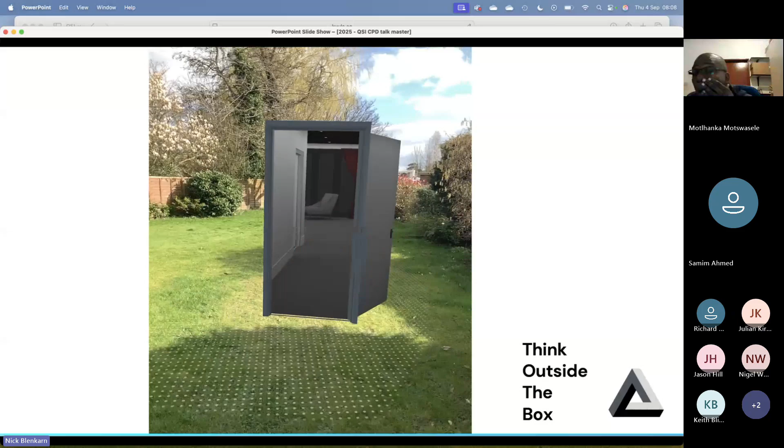Using it respectfully and using it sensibly - there's no point diving into new technology and doing something wrong, as we said with AI at the start. So a bit more of an introduction.

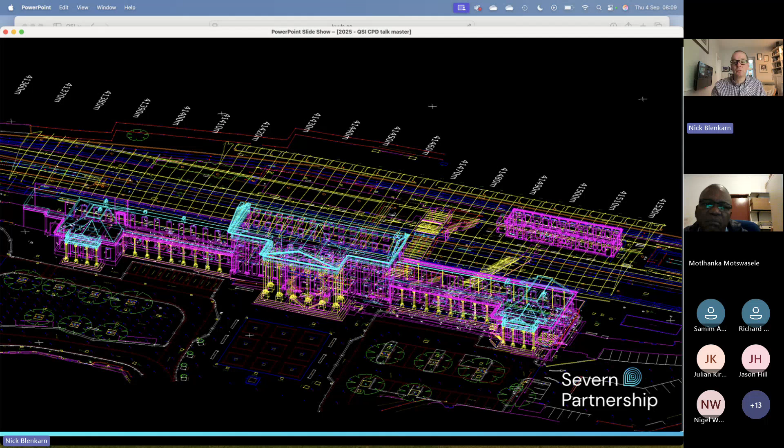That's my background: surveying large infrastructure projects, measured building surveys, elevations, and progressing to laser scanning, which we all know very well, but still massive data sets, very clunky to get into. Usually you have to have a powerful gaming PC to actually access and use it sensibly. So all this wonderful data quite often comes too late in a project and is too heavy or complex to look at and use. By the time we've gone from specifying elevations through to getting complex building information models, it's layers and layers of complexity and very heavy data, complex to visualize.

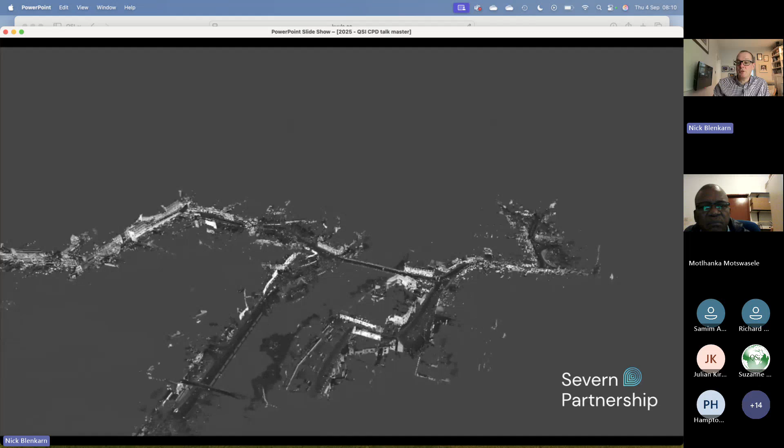If we have a look at one example - everybody knows static LiDAR, and hopefully most people know mobile mapping, but I have to put this example up. If you look on BBC Countryfile, there's an example of this being used by the National Trust by my old company, Severn Partnership. This particular example shows how you can get 5 minutes drive through town, real-time mobile mapping on the back of a vehicle. Since this was done, they're also able to, at driving speed, map the pipes underneath the surface of the tarmac. The accuracy we're looking at is a few millimeters on a cross-section side to side on the bridge, picking up all the elevations as you go through.

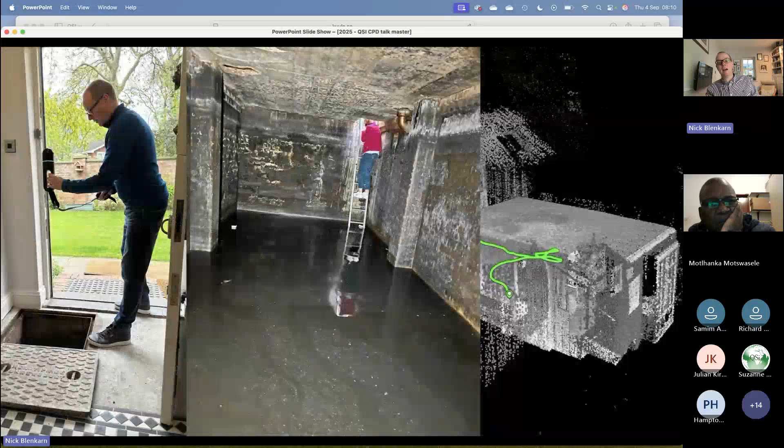So this is 2014 - you can see how far we've come with data now. That kind of data is actually subject to AI now, automatic pothole detection, automatic mapping, automatically removing cars from the scene. There's a lot of automation, but still we're only just getting to share that data nicely.

Moving on very quickly - this is my own house. When we moved in, we knew we had a well in the front of the porch, but it turned out it wasn't a well, it was a tank. So the first thing we did was use the BLK2GO scanner and scan it. What you can see on the right-hand side is live data from the scanner actually scanning that tank as it's going, on my mobile phone.

So we're starting to get more access to the data - you can see what you've got on screen there, and you know you've got it in the field. That makes it easier to get very complicated information in nooks and crannies around a site. Never let anybody tell you that you can't get information down there, up there, above ceiling tiles, down in tanks. It's possible now if you're using the right tool for the job.

Very quickly, as I say, this isn't about laser scanning, but I had to do a bit of an introduction. There's handheld kit with a 360 camera on top, which allows you to very quickly walk around the site, use active LiDAR with a scanner like this FJD Trion, taking 360 video at the same time as scanning, using the video to colorize the scan cloud and enable very quick mapping.

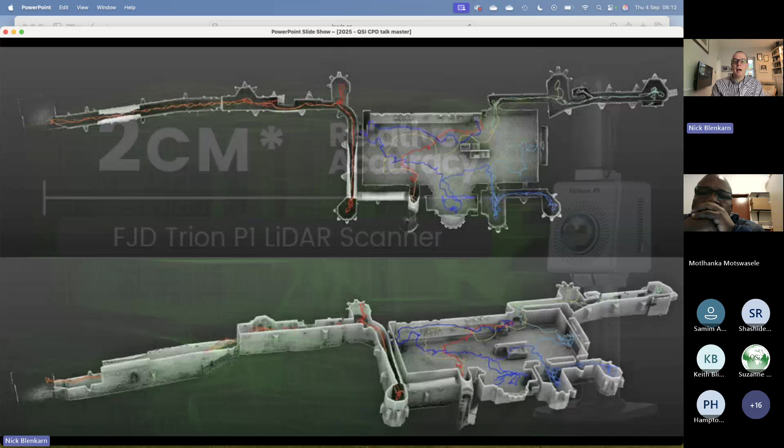If I quickly go on from there, you get things like the NavVis, which the NBI at Wolverhampton have, which shows you what you've got, gets a trajectory around site. You've got confidence in your survey, and you can scan an awful lot of information in one go. We've got some live examples of NavVis if anybody wants to see those later. So what you can do in a day or 2 days with the NavVis is what used to take maybe a week with a terrestrial laser scanner, and that's the kind of data you're getting from it.

So the point of showing those was to give an introduction to high accuracy virtual tours. If you can get that kind of NavVis scan data very quickly, right at the start of a project, you've got the ability to add information to it, add notes, add tender information, and measure from it. I say measure from it because this is a quick screenshot of some windows open in NavVis IVION Go.

So the point of NavVis, as an example, is it's high accuracy scanning down to a couple of centimeters, or even a centimeter if you do it well, but processed in the web and delivered almost next day. The processed data can be used in a web page and shared with non-technical people.

So you can share it potentially with the right allowances for security with contractors at the start of a job to give them a level playing field to look at the site, to hopefully - and these are some of my key points - aggregate information in one place, georeference it against individual items in that scan. It's showing you 360 images, which we can see on the screen, and behind that is the complex scan data you can measure to the centimetre from.

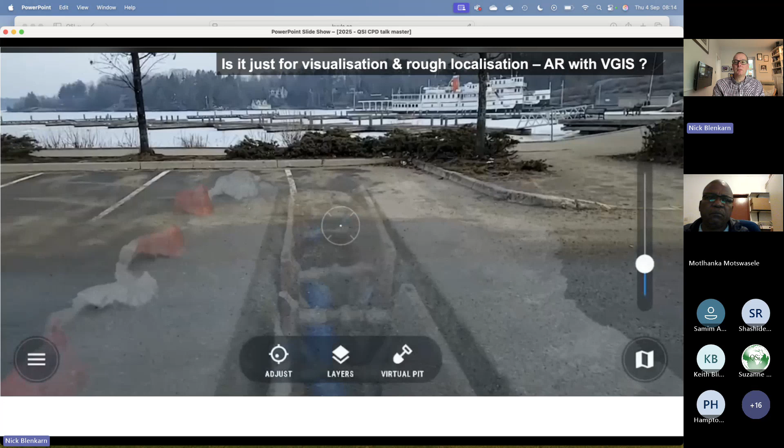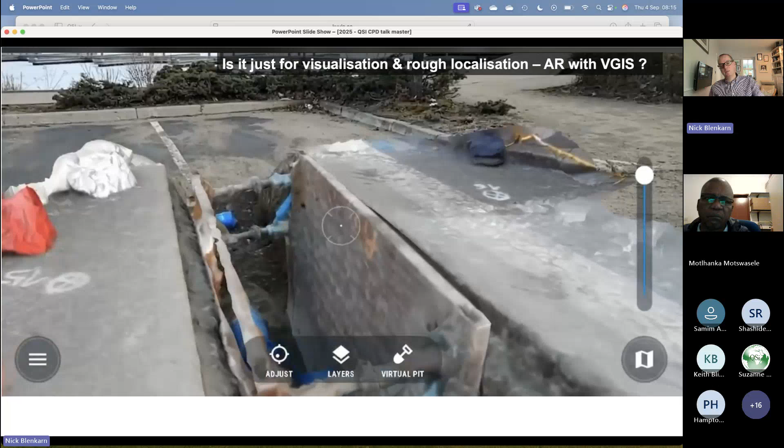That's the high accuracy end, but it's always worth stressing at the low accuracy end on site, there's systems like this. This is VGIS, again, handheld. It scans very quickly. It's probably accurate to about 50 mil, but very quickly on site, you can get elements that have been dug up, covered up, and you can view them in position, in real time, in augmented reality, to a low level of accuracy, but good enough.

So if somebody's got this kind of level of detail on site, then to be able to share that with contractors coming in and not just say, oh, well, there's some pipe somewhere in there, you need to deal with that - show them what they're dealing with. Again, digging a virtual pit, as they say on the screen, here's a great way of looking at that solution.

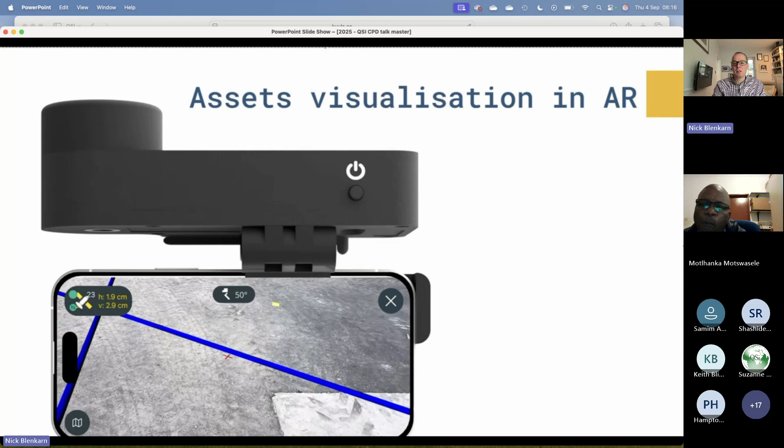And allows you then to use more systems back in the office to see, to line up what 3D information we've got under the ground, compare that to the information on the ground and be able to visualize it on site, or do the basics of measuring areas, volumes, taking dimensions on site. Again, it's getting into the realms of being very quick, and if it's quick, it's cheap, it's fast, and it's lowering programs.

And the last part of the laser scanning bit I wanted to show you was a couple of different systems, well, mainly Sensat. Up until a few years ago, you've got massive point clouds and big projects that I was working on in terms of infrastructure. They're very hard to share and collaborate with because everybody's on slightly different systems. Not everybody's got the high technology and the right license.

But if you've got something like Sensat, then it allows survey data, point cloud data, images, mapping data, designs, all to be gathered in one place and used as a collaborative system to share on a project to aid communication. One of the main things for QSs must be communications in terms of, does everybody have the right knowledge? Does everybody have the right plans?

Used to be terrible problems in my days of date stamped plans. Are we working from the right plan? No, it's an old plan, it's an old design. There's lots of systems for that, ProjectWise and large systems, but as an aggregator way to easily, non-technical, get hold of large areas of data streamed by the web into one place.

And if you look very carefully again up here, the bar on the top of that little screen shows date stamps of data at different times. So we can show progress on the project. We can look back, we can see what's changed, we can take volumes and information from all of these elements and we can tag it. And then we can start having conversations about individual locations, not just about emails and data.

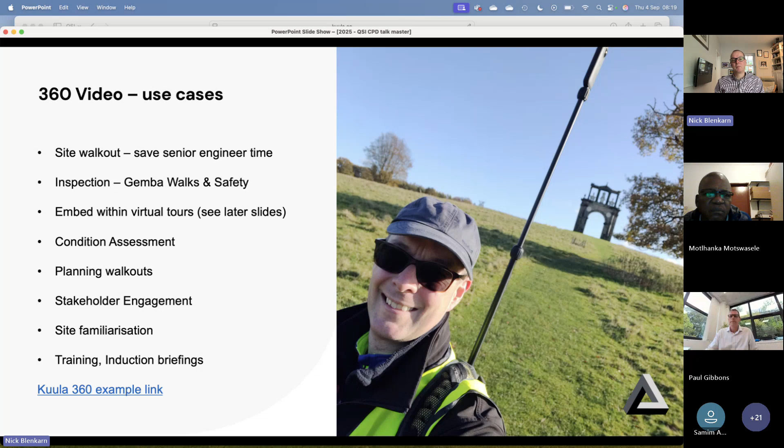So if I look at a little bit of an example - oh, not that one. That's a 360 video of a dog on a hill. Forgot to put that one in.

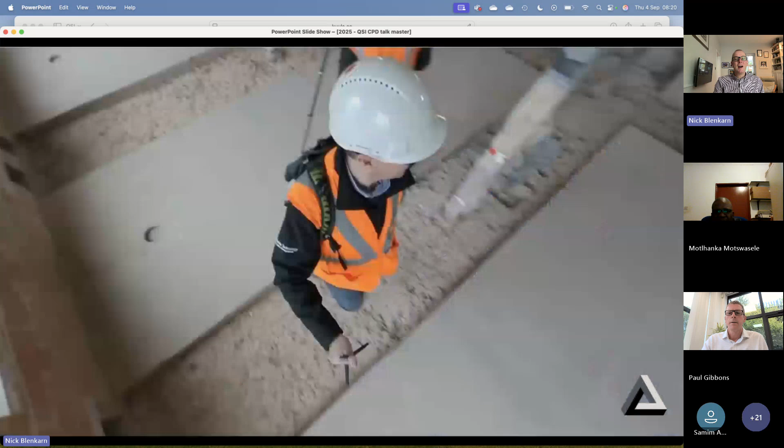This one is a Historic England project. The flax mill, the very first high-rise iron frame building in the world. Happens to be in Shrewsbury, my hometown. We were asked to come in and do some virtual tour information at different stages through the project to give it back to Croft and English Heritage and let them share it with other people.

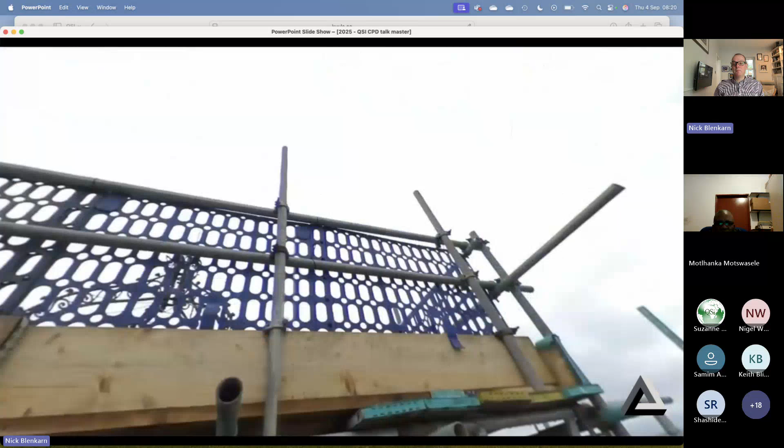Now, what you're seeing here is flicking through very quickly, but you can see the hand on the screen is just my mouse, and it's grabbing and moving around that image, front and back, left and right, as we go. So that's the first thing - you can stop, you can pause that video, you can look at it, you can zoom in, you can look behind you, and you can get a very quick assessment of a very large area of site just by walking around it and sharing that video.

There are tools in GIS that you can use to actually put a snail trail on a map. If the video is linked to your phone and knows where its GPS is, then it's very easy to go through and track where, as a snail trail on a map, that video was taken, and then jump back into individual parts of the video to see what it looks like there. So think about this in terms of sharing existing conditions.

And if you take video, you can also take static images. This is a quick program called Kuula, which allows you to take static images, put them into a base map, an image or a plan, and then start adding information around. So again, very quickly, we can add 360 images, other information, jump inside, maybe link it to a Matterport, and then share that on the web with other people.

And if the cost is £400 for the kit, you're looking at the time it takes one person to go there. With all these techniques, what to think about is the time for a junior person with very little experience to drive all the way to site, to capture 360 images, to rapid scan data or virtual tours is critical, really, because why send - I remember going to do a hospital in Brighton - why send 10 people to site to walk around and have the same tour briefing when really the person giving the briefing could walk around with a 360 camera, giving his briefing of what's where for a quotation right at the start of the project, and then send that out to everybody.

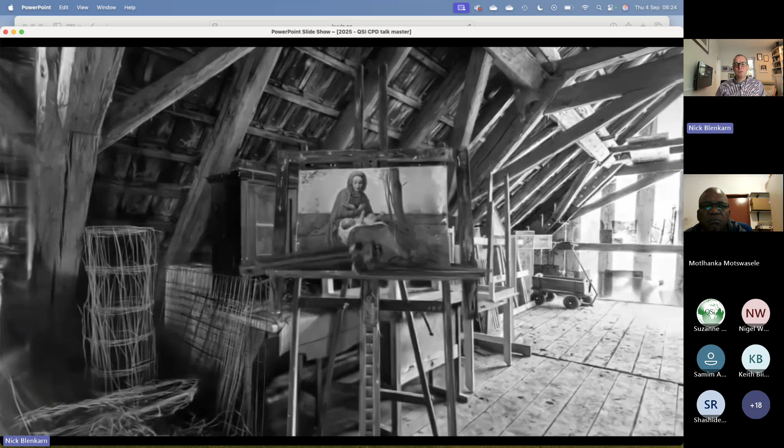So you can see that live data. That's not an image or a nice video, it's effectively a screenshot of live data that you can move through in 3D space. To show you how eloquent it is, I accessed it on my phone and started navigating around that 3D data. A very quick explanation of what it's doing: that is not a 3D model, amazingly, although you can view it in 3D and zoom around it.

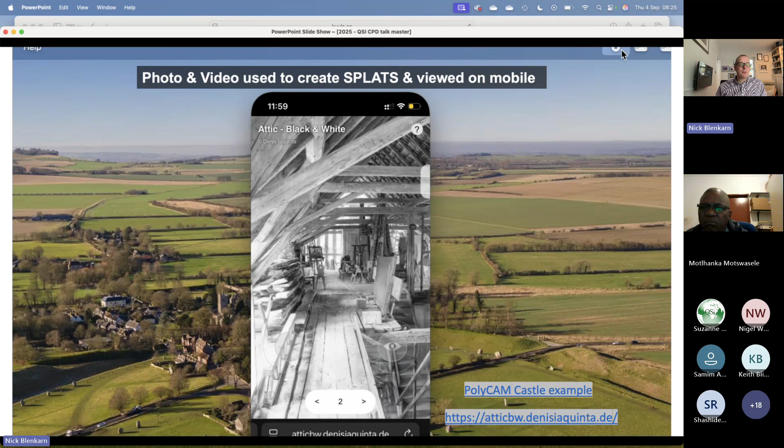It's a bunch of splats, little oval shapes floating in 3D space that are rendered with a color and a location as you're looking in that direction. So instead of creating a 3D model, you're creating a group of splats in 3D space, which when they merge together, make it look like 3D. They figured out that this is a much faster way to render, in other words, to view a 3D model or 3D information.

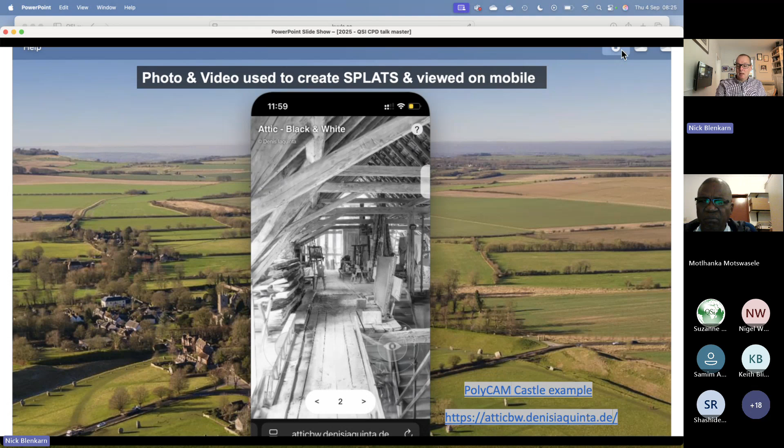So instead of having a large 3D model hosted in the cloud and then pulled into your mobile phone, which takes forever, you're just viewing what you see in front of you, and rendering that in these Gaussian splats - a very quick and easy way to do it. And if you pay a little more attention and combine a bit of laser scanning with Gaussian splats, you get this level of data, which I think is absolutely outstanding.

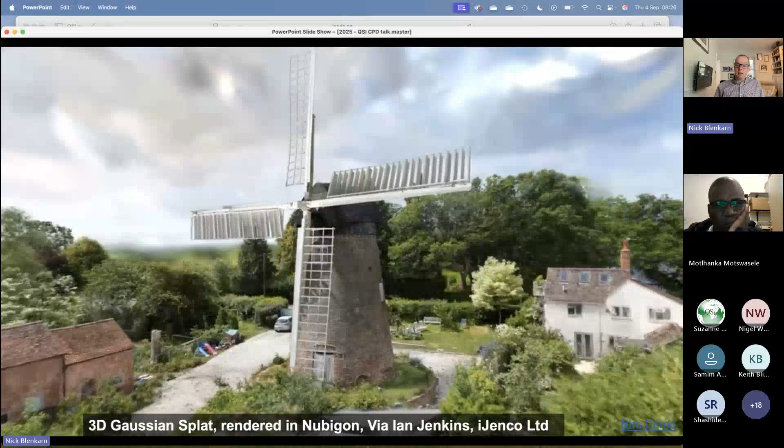So this would have been a few hours on site - a couple of points of scan data to give a dimension to all that information, to give it something to lock the photos to. Then in programs like Nubigon and Gaussian splatting algorithms, they've combined the scan data and the splatting algorithm to give this fantastic 3D model.

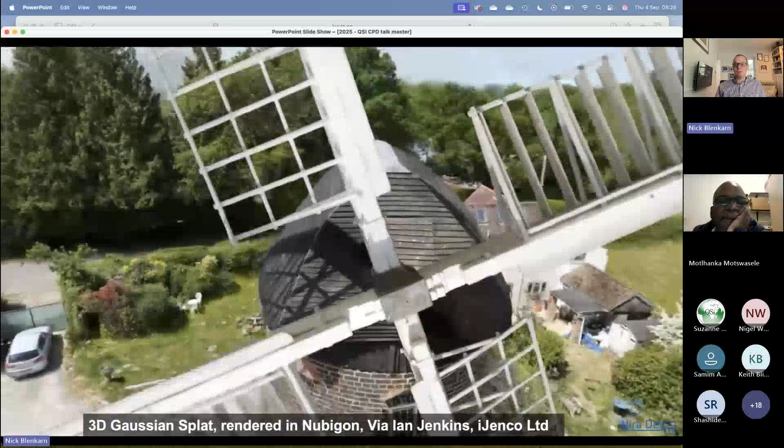In terms of inspection, internal and external, that's an amazing data set, which then could be shared live. If we pause that and just prove the point, I'll go through past the attic. This is the same data that's running live in my web page. It's not been animated to be a video for a fancy LinkedIn post - absolutely outstanding level of detail. I'm going to come out of that so I don't kill my browser, and redo this one.

So this is a similar example. They've thrown a drone up in the air, no scan data for this one. To get information on this tower, they've flown a drone around it and then put it into a Gaussian splatting algorithm to get that information.

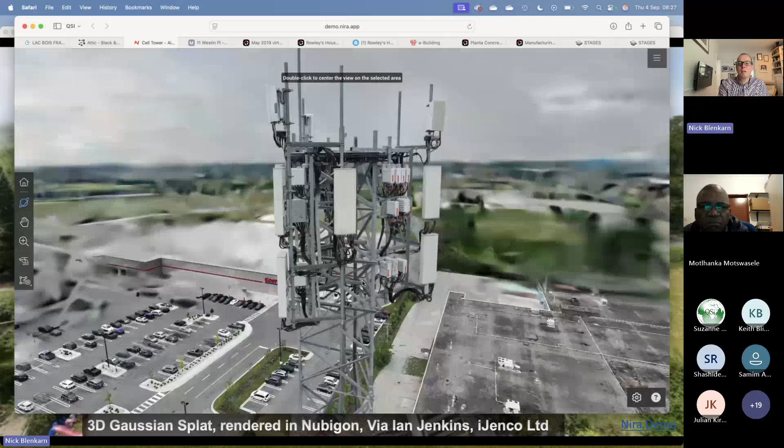In terms of survey data, I would have been pleased with a few reflectorless 3D points to show the size, location and orientation of those. But what you can get nowadays, and critically remember, viewing a browser is absolutely outstanding.

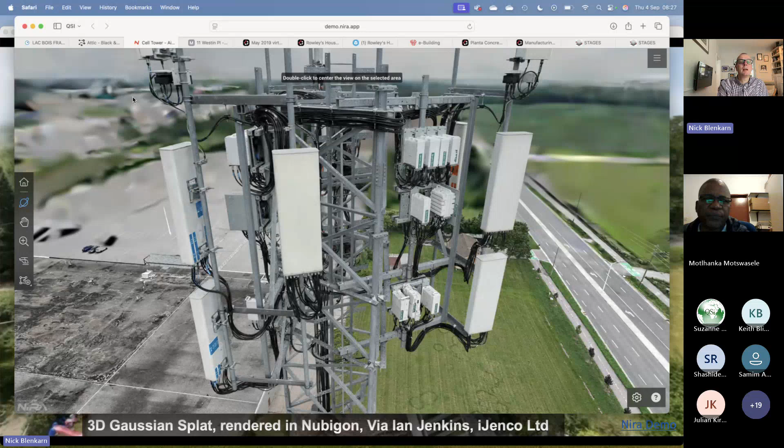So we're going to flick back into here and we'll move on. So Matterport is a virtual tour platform, combining together what we've seen so far: virtual tour, LiDAR data, and 360 images.

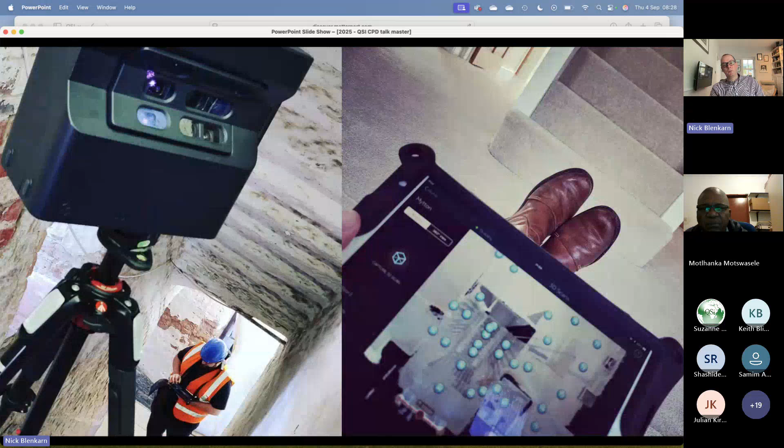Matterport is an active LiDAR scanner. This one's an older infrared version, you can see the pulses of infrared coming out. You set it up every 3 meters, or with the latest kit, every 8 meters, and take an observation that takes 15 seconds to do. You log it in an iPad, process it in the cloud overnight, and you end up with this.

So what it's doing is taking 360 images. Behind those 360 images sit point cloud data, and that point cloud data is used to create a mesh, which is the mesh you see here. And that mesh gives us this kind of data.

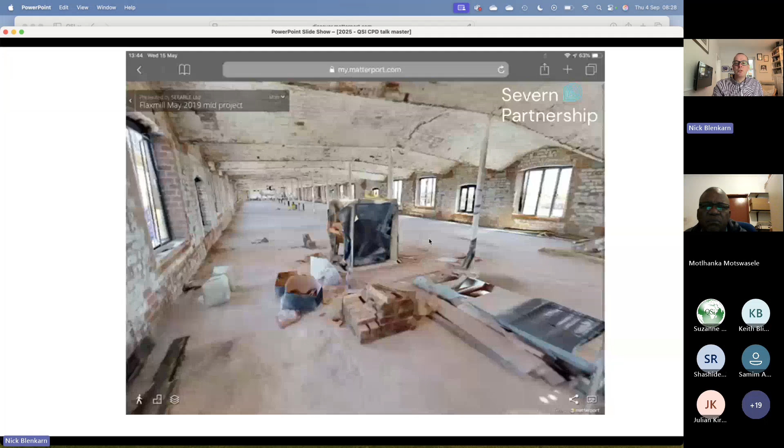So again this is the flax mill. This was done in a single day, 8 stories. We took 360 images inside, and it was processed, taking 2 days in the cloud. It was scanned on the Monday and delivered Wednesday evening to Historic England.

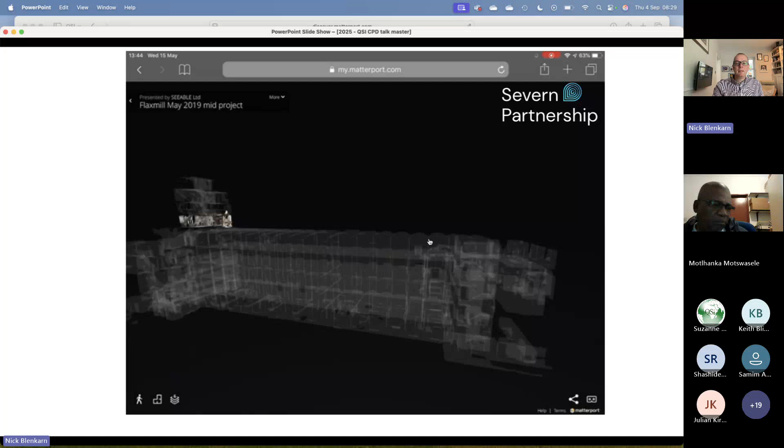Now this is something that can then be used. You can change it by floor, visualize a floor at a time. You can view it externally in what's called the doll's house view, and you can go into it and measure from it.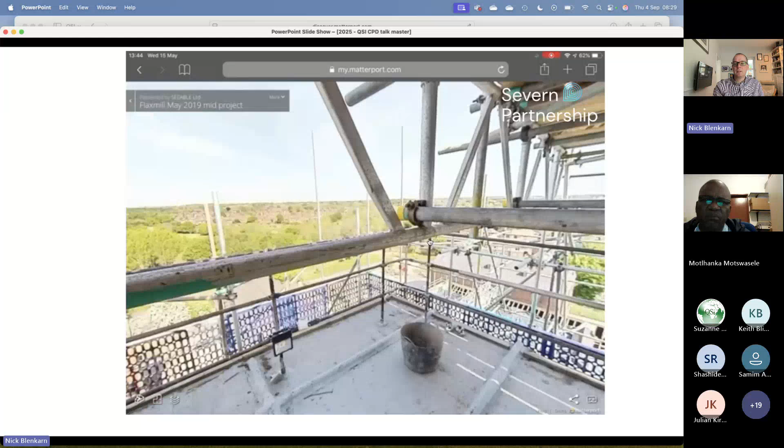So this is primarily used in the UK for residential and commercial property sales, but underused in terms of information at the start of projects.

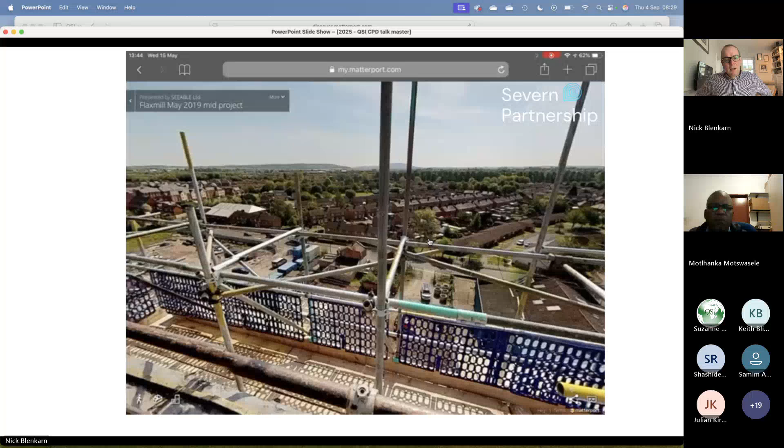When I was working for Network Rail on projects, we'd do a large station survey, and every time we suggested this to them, they would say right, okay - the virtual Matterport tour goes into site and does that right at the start on day 1 of access to the site. At the same time, as soon as the Matterport was done, they'd send the survey data in there to get the scans of the site and create the plans.

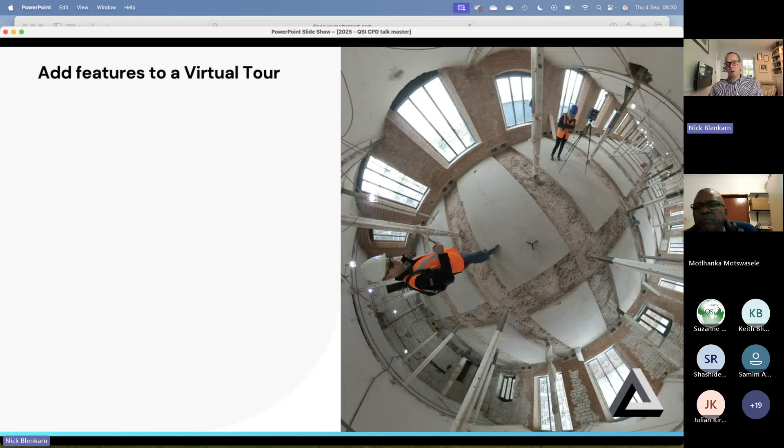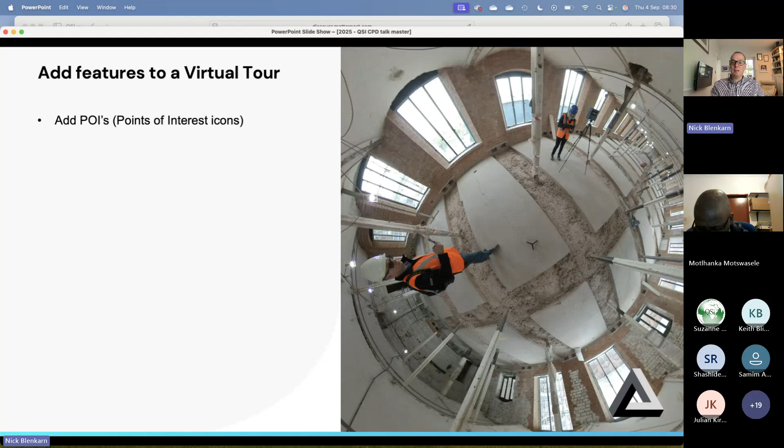But the critical thing about the Matterport data is it gave them a rough 3D model, accurate to within 2 or 3 centimeters, and it gave it to them on day 1 of the project, not end of month 1. So they immediately had project information in 3D they could start measuring from, they could start using for health and safety briefs, all the good things you could use it for.

And in terms of a virtual tour like this, we can add points of interest to it. We can embed it in windows. We can look at external links in there. We can stream 360 video into it.

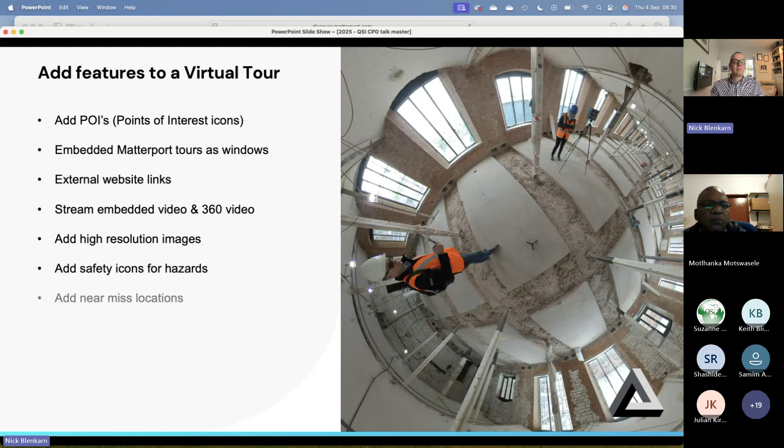We can use it for hazards, near misses, safety points, and we can actually start adding an awful lot of information to it. We can put key points and have those as a little persistent menu very easily to jump around into, and we can start adding plans and information into there as live data.

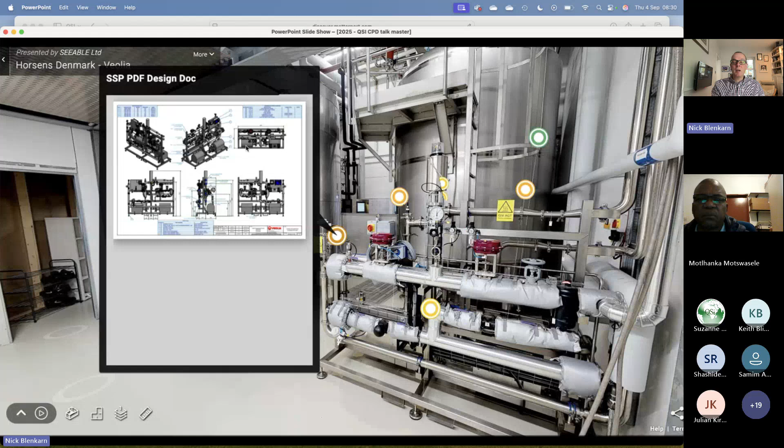I'll skip past that one because it's just showing how you can view videos and photos.

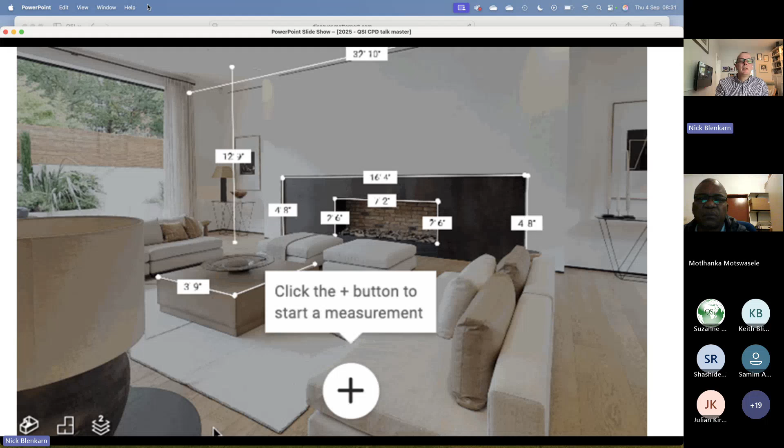Now, as an example of what you can do, I've flipped into this one. So this is a Matterport tour. You can see we're looking at a 360 image there, and what you can see is I've turned on measurement mode, so you can take free measurements of anything you want - if you want to measure from the corner of there.

Now, bear in mind, this is early access to information, giving you a rough idea. So rough idea, I mean a couple of centimeters would be about the right kind of accuracy within a room. You can get better than that, but that's roughly right.

But it's also got this automated feature now, which has come over the last year or so, where it automatically does that for the main dimensions of the room, which you can hide or show. And because it's got 360 images inside and out with the latest scans, you can actually scan inside a building and outside the building.

With the advent of intelligent AI and add-ons, you can actually turn off the measurements, but you could also remove the furniture with a function called defurnish. So you can start to play with this data a lot better and share it. And if you go along to a client and say, I want them looking at this dimension here, turn the furniture back on, in that direction, looking towards that portal, and you press U, you can copy a link to the clipboard, send that in an email, and they will take them directly to that view.

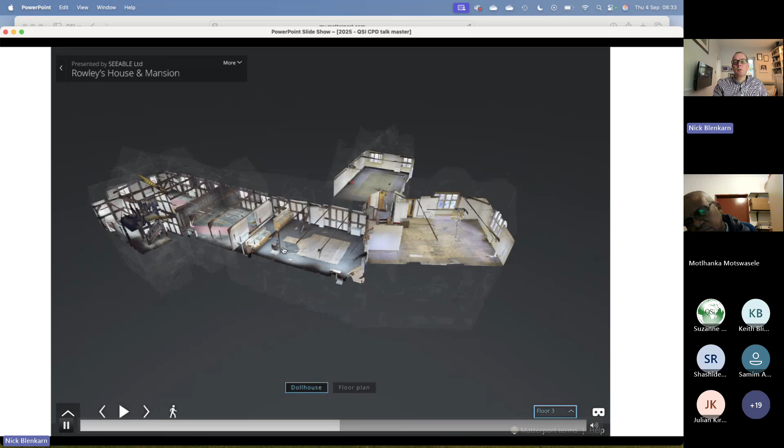And this 3D mesh information is available to download as OBJ files and then put into a different program. So if you wanted to give it to somebody technical who's got 3D access to programs more powerful than Matterport, you can give that mesh to them and they can start chopping and changing it, measuring it from it, looking at quantities. And it's exactly what I did on a very small job for the room I'm in now and the building I'm in now, the old stables.

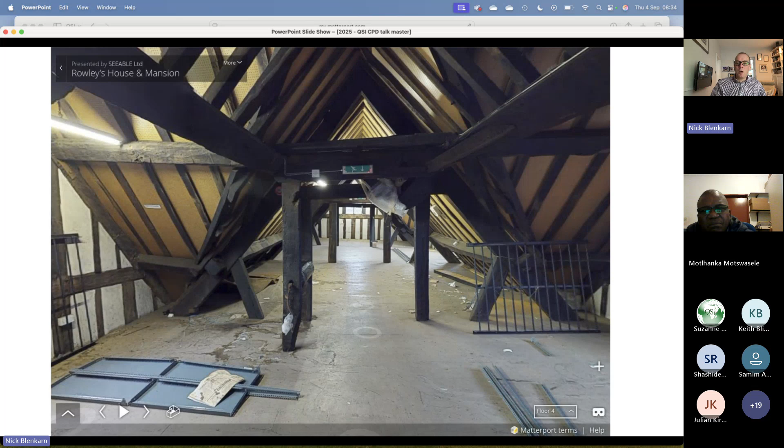I spent 2 years doing a refurb project on it, and I used the mesh. I put a clipping box around the mesh to give me cross sections through the building, and used measurements on that to figure out where we were going to knock through walls, how we were going to get into loft spaces, where we're going to make double height ceilings.

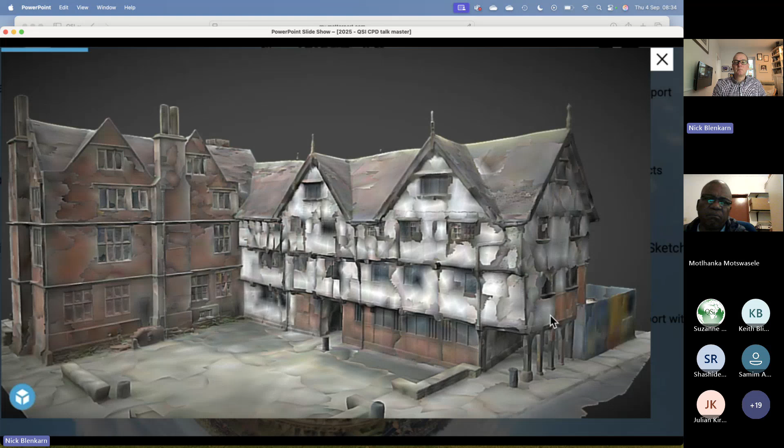And to move on quickly, you can actually use drone and survey information and get that hosted on the web with programs like Sketchfab, which then allow you to look through the external high accuracy information, tag it, add information to it, but also view that in context.

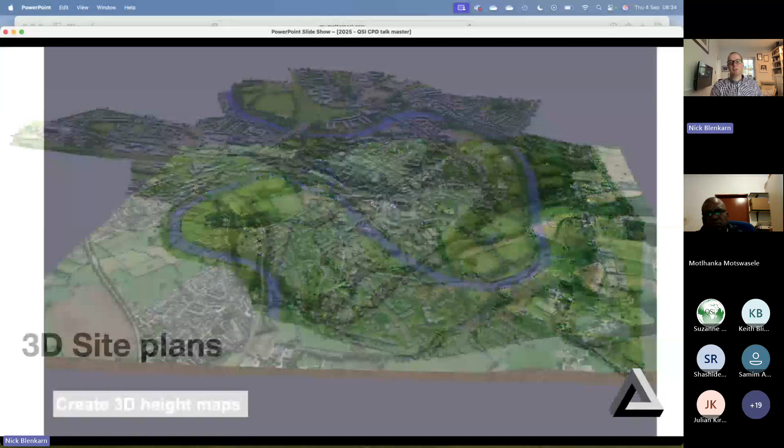If I look at an example here, if we've got a 3D plan or information around a site that we can seed information onto, then that allows us to do things like this. So if we've got multiple Matterports, each little number on there is a different Matterport scan. We've taken 3D information, which could have just been a 2D plan, linked that to where each Matterport scan is on that site, and then just put little hot links to jump you into the Matterport scan.

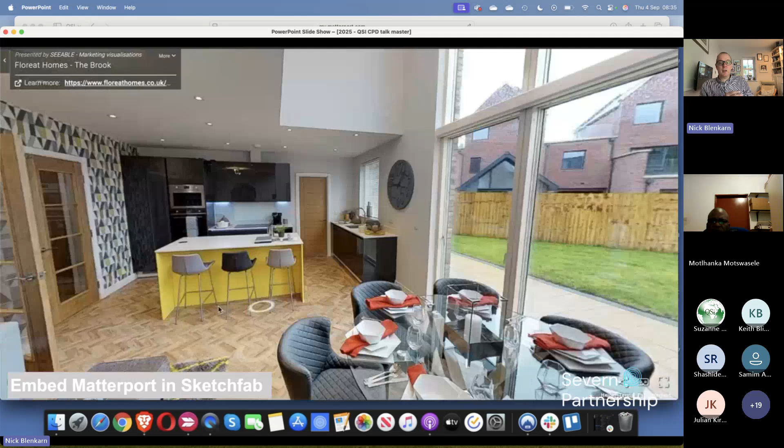So that's combining two online solutions, Sketchfab for putting 3D external information to, and Matterport for putting the 3D internal information to. And that allows us to look at multiple sites within a university complex or estate, multiple sites within a town. If there's lots of different scan positions you need to know, you can pull them together in one area.

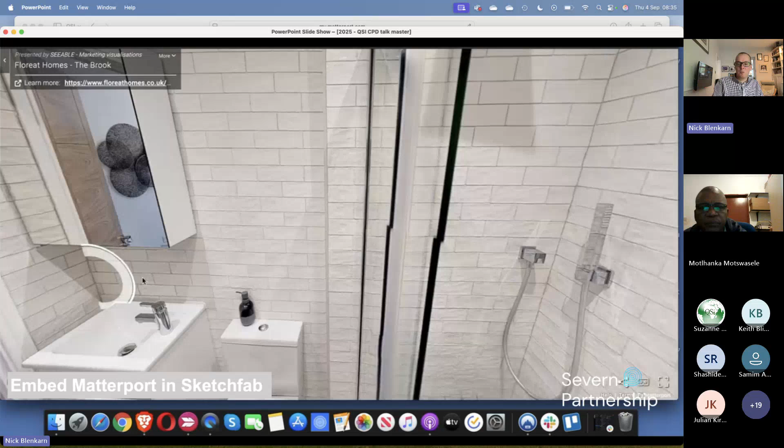Now, we're moving quite quickly, but hopefully you can see the thread of information. It's all viewed online and it's all easily accessible, easily used. Now, this was a great project, which I can share a link to as well, by eMaking.

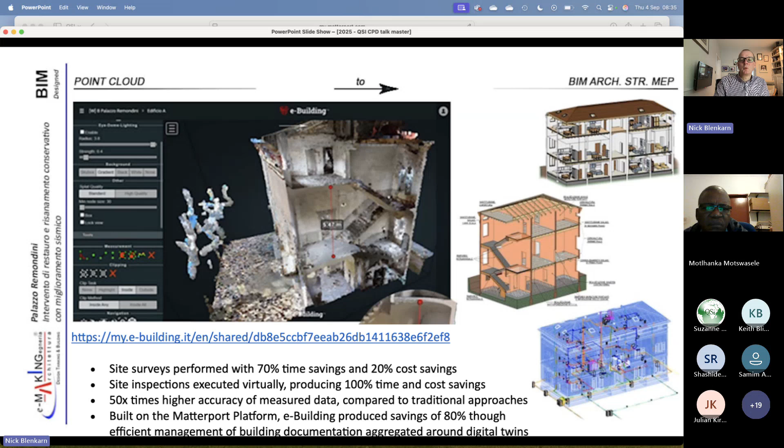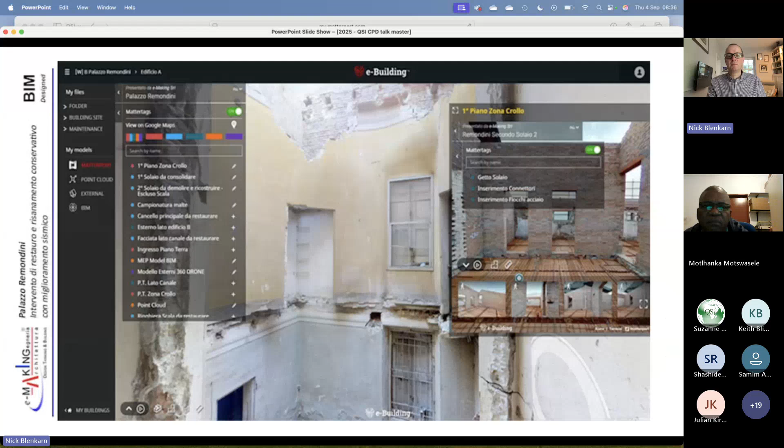So it was created and it won an award for collaboration, because what it did was it took the central information of a Matterport scan, and probably better viewed if I jump into the online version, but it combined together Matterport information, building information models, M&E plans, roof plans, and 3D data. And it did that, I'll come out here, in this system. So again, you can see the Matterport information in the background.

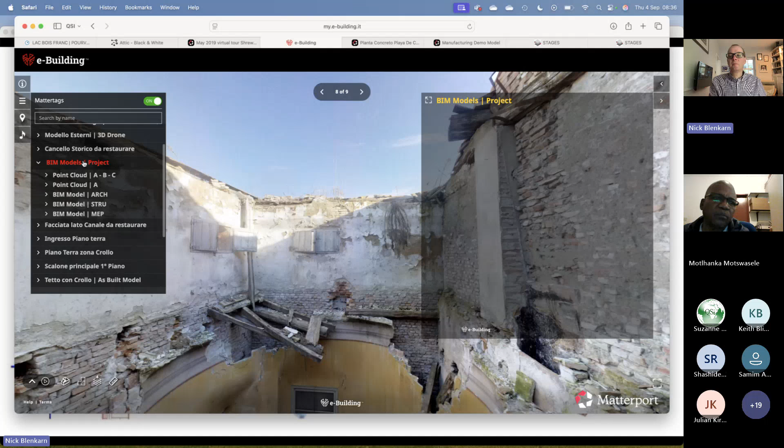But then what they managed to do was create different Matterport models at different time stages and allow you access to that in a little window portal. But also give you access in the same system to building information model that could be streamed into that window and shared in the same place. So very cleverly, they allow anybody to look through different epochs in the building process, different data that's been gathered, put it all together in one place and give anybody a tour.

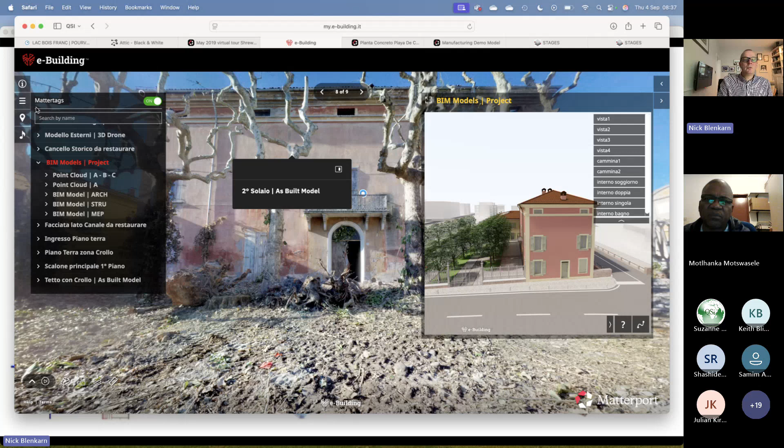So if you think how useful that is for sharing back with clients, for showing progress, for recording on a building, but also for starting to think about the UK concept of the golden thread, which actually puts a thread of information through a project and allows you to start to aggregate information and keep it and share it and hold it.

So that starts to make us think, okay, well, is that a digital twin? Is it a digital model? Is it just a digital data set? A quick primer for you in terms of the best way I've seen it explained.

A digital model is just a scan or a model of a physical item. It doesn't do anything, it just exists in 3D. You can explore it. A digital shadow has information delivered to that model that's actually live data.

So Matterport would be a digital model, but if we had live information of temperature in a room, that would be a digital shadow. And if that live information of temperature in a room actually actuated when it got to a certain temperature, it automatically opened a window, that would be a digital twin, because you've got an automatic flow of data which is affecting the physical from the digital. So that's a good way of explaining it.

And the other thing we have to deal with coming up in construction projects is this golden thread of information, also linked to the building safety regulations, where you can keep information held all the way through a project.

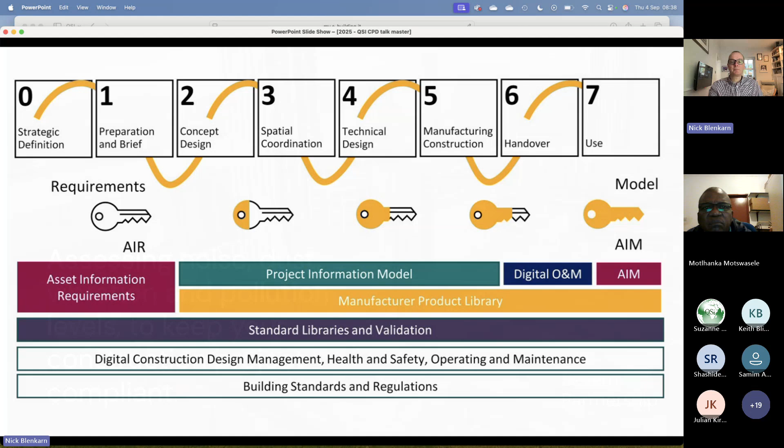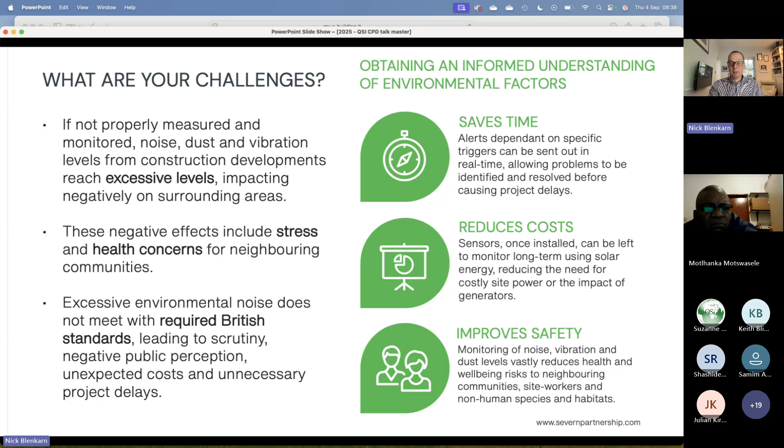Now, we're running short of time, so I'm going to skip past this one very quickly, but think of live data within a virtual tour could be noise, dust, pollution, which have to be logged on sites now for nuisance and for regulatory purposes. Those can be live sensors like that, movement sensors, dust sensors, noise sensors, pollution sensors.

The batteries will run for 2 or 3 years. The data goes up live to a website. You can put alerts on it, but also you can feed that data into your virtual tour.

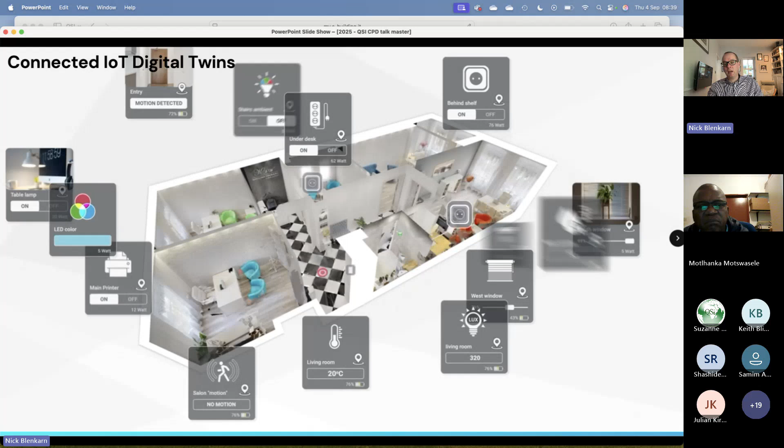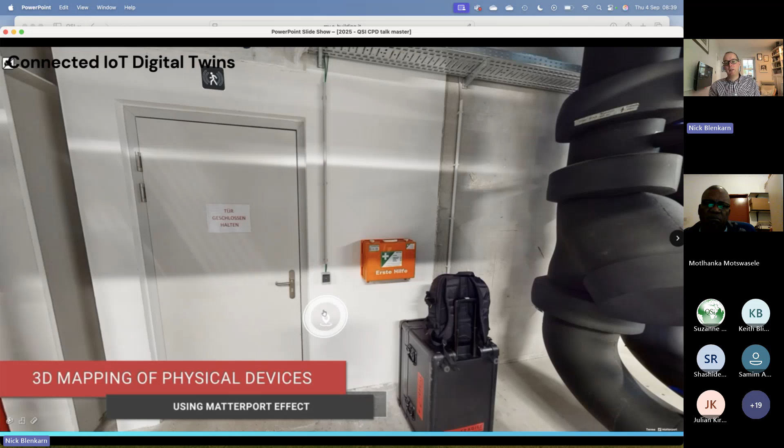So if we can have live data delivered into a Matterport scan or a NavVis scan or a different solution, that opens up a whole world of things we can do later on in the project. So we can not only do this at the start of the project if there's things that need to be delivered, but we can host that data that we scanned at the start. We can scan in different epochs and also use it at the end for facilities management by adding information to it. So think about that.

And what I'll do as the last example is to show you a way that Matterport has been used as a platform by a company called SimLab, who I had a meeting with this year, to produce a couple of different solutions. One is Stages and one is Simon.

Stages takes the Matterport scan. It has the Matterport 3D mesh behind it, but it also enables you to view the point cloud and the building information model and extracted 2D floor plans. So this is the kind of thing we can view on there: IFCs, PDFs, OBJ files, FBX files for 3D models, point clouds, and Matterport 360s.

So we can aggregate all that information in a project, but what makes it really useful is we can then do that at different stages through the project. So Stages allows you to take a scan of a building on week 4, week 9, week 12, week 14, week 17, and keep them all in the same program, all evidenced, all with information when it's needed, added as points of interest referenced into those rooms and held in a database.

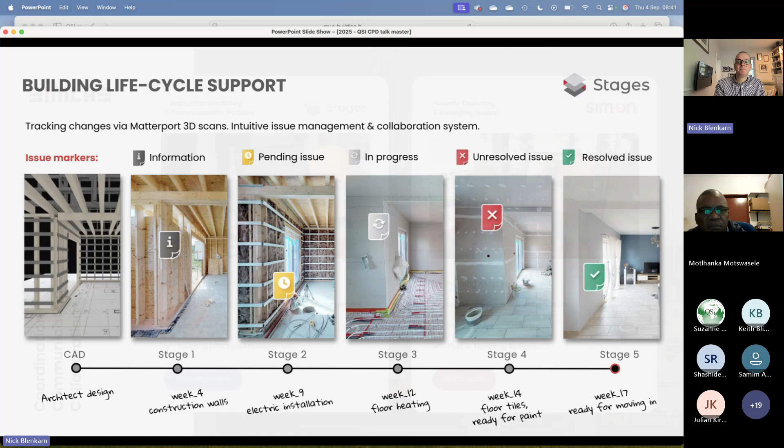And later on, that could also be used with a similar package called Simon, which allows you to add that live data feeds in and use it for facilities management.

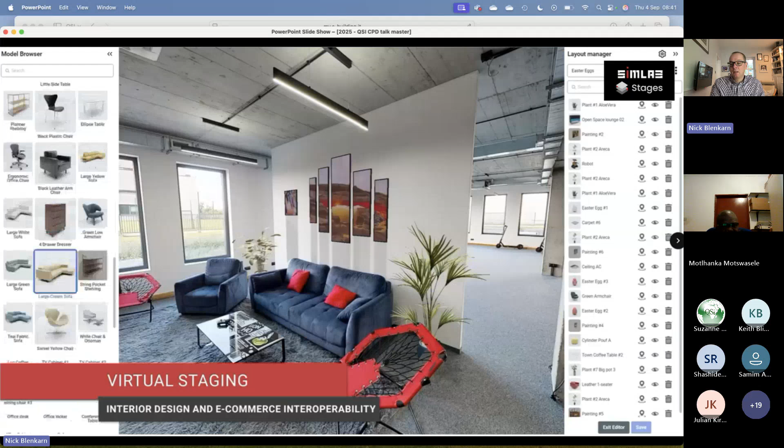And it also allows us to do funky things if we want to, like add 3D information to a model. Well, that might be fun for marketing, but that also means we can add a 3D digger or a forklift truck on there. We can check, can something fit through a 3D space just by putting it in there in augmented reality or actually in the model. So we can start to play with the data in ways that used to take very complicated software to combine 3D information together, and you could almost do it yourself.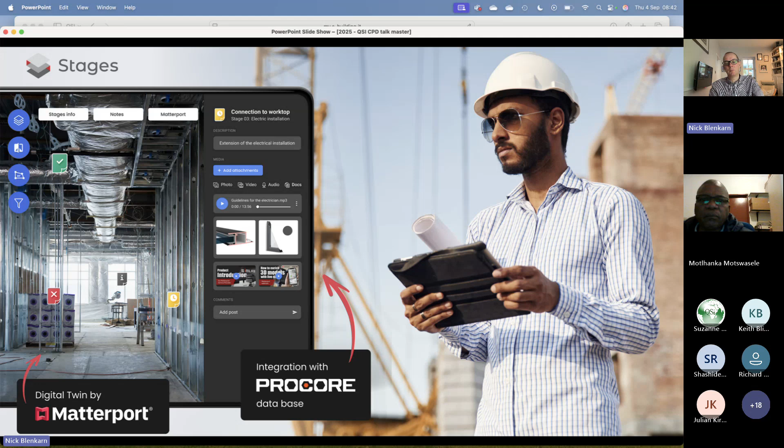It has integrations with something called Procore database, which hopefully you'll be more familiar with than I will be, but it allows you to start using it as much more of a QS tool because we've got those date stamps of information and we've got them logged in a backend database against 3D locations. So to actually use this for construction management, asset management, and then maybe later on for IoT devices, it makes it a useful tool.

And in their words, this is the kind of benefits they're getting from it. So decreasing in-person site visits from stakeholders, which we've already talked about, by 50%. I think that could even be a lot more in lots of cases.

75% visibility of building intelligence improved by live data. There are lots of ways to actually reduce the time spent on site - site surveying time reduced by 70%. And if you're reducing time on site, you're reducing risk, reducing program, and reducing cost.

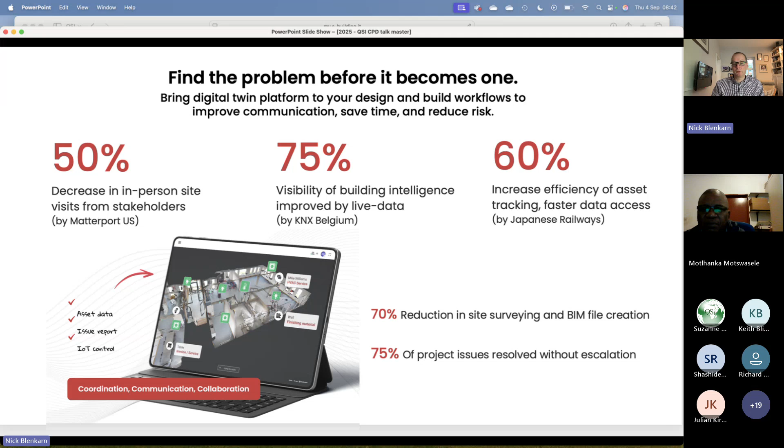So we've done a quick run through. I wanted to try and keep this to 45 minutes.

We've looked at vehicle-based mobile mapping, just to show you what you can do in a short time. Rapid Accurate SLAM, which was NavVis, which you can see examples of at the NBI. Handheld SLAM, Kick the Map, a good system from Jennings and Cook. 360 video, 360 images, and how you can put those into an online tour, Kuula being the easiest, simplest and cheapest - you're looking at about £40, or maybe even £30 a month for Kuula.

3D splats are a way to visualize 3D data and share them with people. The examples I showed you of the tower and the windmill mean that if you add a little bit of scan data to that, you can combine those splats into a 3D model that is georeferenced, measurable, and accurate.

3D tours, Matterport, again which I've done and NBI have done. Hybrid tours, which is the e-Building example of combining BIM and virtual tours. And lastly, we've looked at SimLab Stages, which gives you the ability to look at information going all the way through a project. As a little example, I've got a project here.

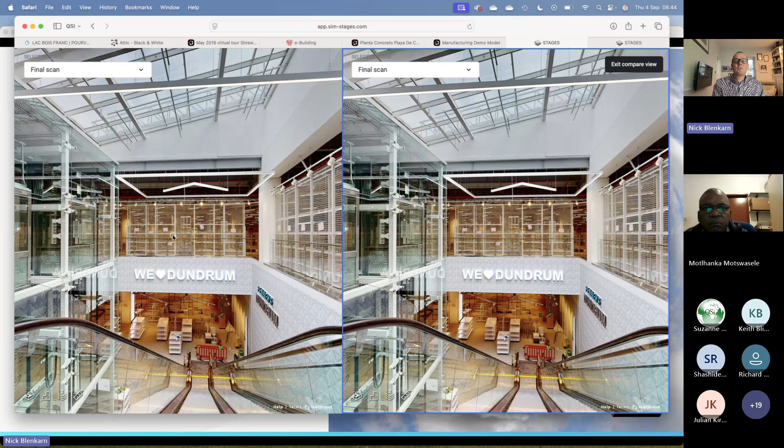This one has been scanned three different times - so a second scan halfway through the project versus the final scan. If the web connection hasn't been killed by my other work, effectively what it does is jump into a location that it can find in both scans, and shows them in windows in parallel.

So you can start to see on a finished scan what was above the ceiling, what's first fix, second fix, where the M&E plant is, what's been done. You could share this to show progress with the client.

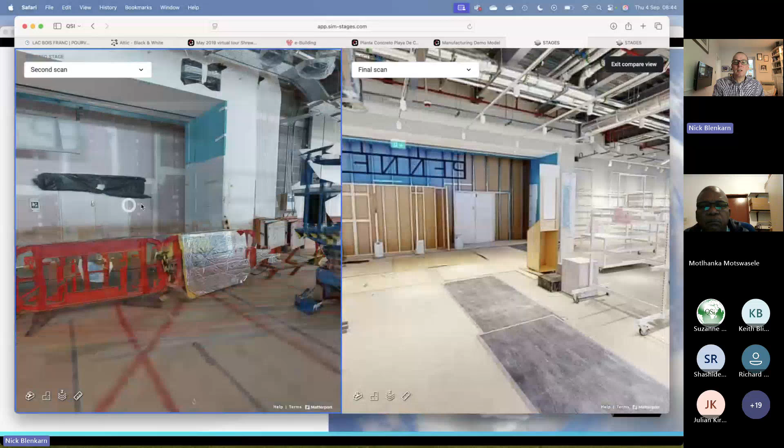And if I look in this one, we've got 11 stages. So we can pick up here and say, okay, let's have stage 4 in this one and stage 10 in that one.

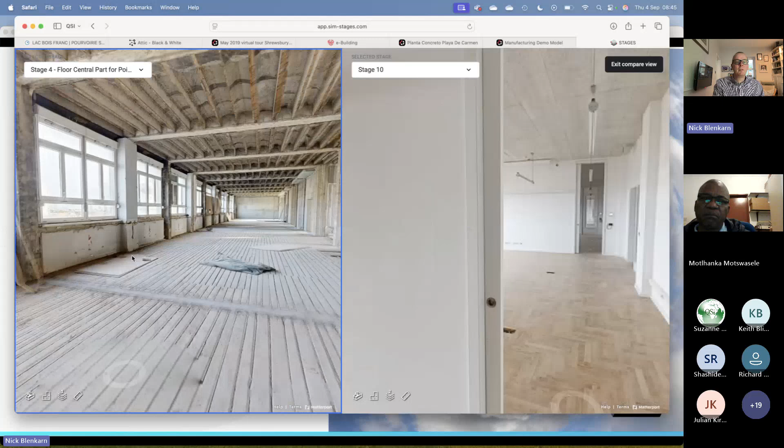And if I turn that off, it should align, and we can start to see there was a partition there. This was the original, kind of as-knocked-out position. And then further down the project, when it's been fitted out, you've got a way of comparing.

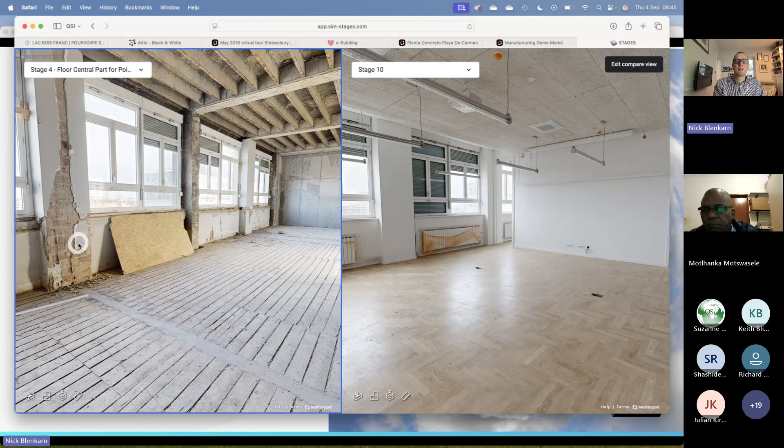All of these are measurable, you can put plans behind it, and you can start collaborating, saying this needs to be done, this is a snagging element. So the whole point is: can you use it for pre-existing contracts, existing conditions, interim valuations, snagging and defects, handover, and even post-project analysis - meaning you've got something a lot more useful.

So I would encourage everybody to explore, just ask the question. We've seen an awful lot there. If I can answer a question at the end, we'll go for it.

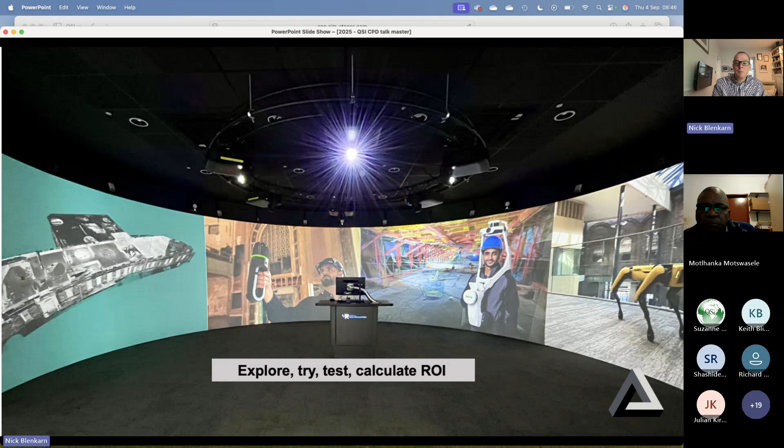But some takeaways: think about democratizing access to that 3D data, because other people can use it. Think about tagging and geotagging points within that 3D space, so you're relating information through to an actual physical 3D space. Think about moving towards digital twins and what they actually are, and what they aren't.

Think about 360 images and video - can you use them? Preserve site details and timelines, cut visits for quotations, and leverage that information you've gathered for QS teams to pass on and use for safety. Use it for briefings, use it for marketing, use it for FM.

So that's a very quick run through of what we've looked at. I will flick out of my presentation mode and hopefully jump back into everybody view.

Right, so yeah, that's me done. And if I go back one, then I can stop that video. No, that's fine, I managed to do that without going hoarse.

So yes, well done, well done. It was a real romp through, wasn't it? A lot of technology. I wanted to put a lot of information in there in a short time, but I wanted to give people a flavour of what you can do and hopefully find some useful points from it. Yeah, a great overview of leading technology.

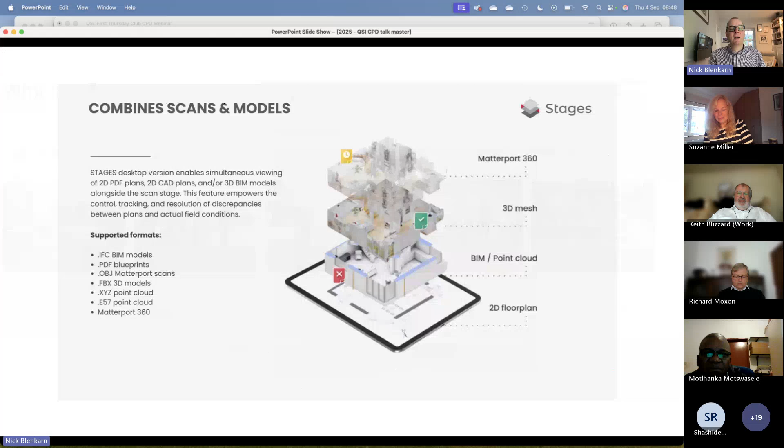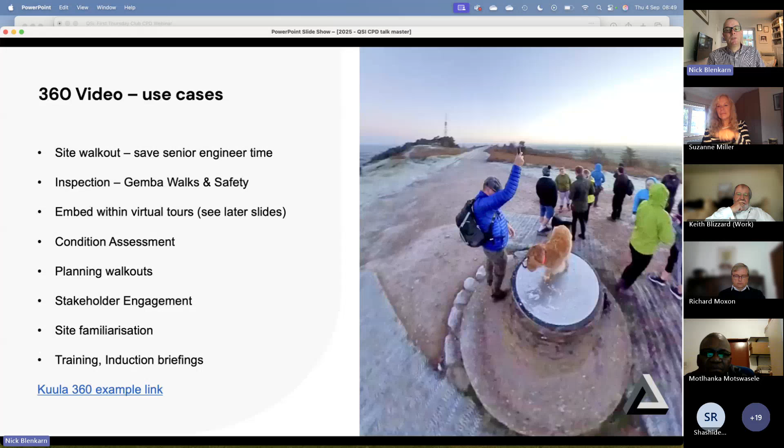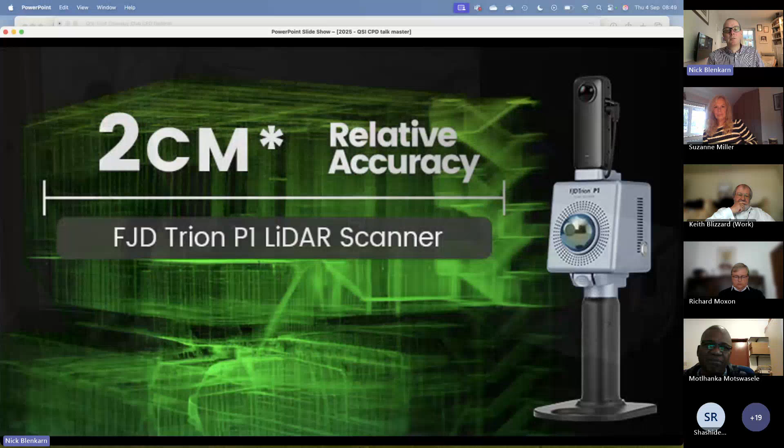The answer, while I'm scrolling back, I'll show you the physical picture of it - above the ground, it's LiDAR, and beneath the ground, it's ground penetrating radar, so GPR. So what you've got is simultaneously, nearly there - yeah, simultaneously, you're scanning above ground. There we go, so what you see there is the scanner above ground. That's the LiDAR, and it's got a 360 camera and a GPS.

Oh, right, yes, and an inertial navigation system, so it's like a missile. It knows where it's going through 3D space, it knows where it is, and then it tracks where it's going with the inertial system. And that location information, it knows physically where this is, which is the ground penetrating radar, because it's a fixed location relative to the scanner above.

So this gets its location, and once it's got its location, it's shooting down ground penetrating radar beams into the ground on an array of 4 different sensors in different directions. So in real time, it's going through and scanning below the ground and above, and then you can combine those 2 different data sets because they're both on the same grid together in one visualization. So you basically get them both in a building information package or wherever as one point cloud, which then you've got to make sense of with ground penetrating radar. But no, it's funky stuff, that is.

It is. But presumably then, if all this is done in the cloud, this is done at the data centers. Well, so there's 2 different things there. One is the processing of that very heavy data is still done locally on a laptop. And once we've got all that data, then we can use programs like Sensat to aggregate it and upload it into the cloud.